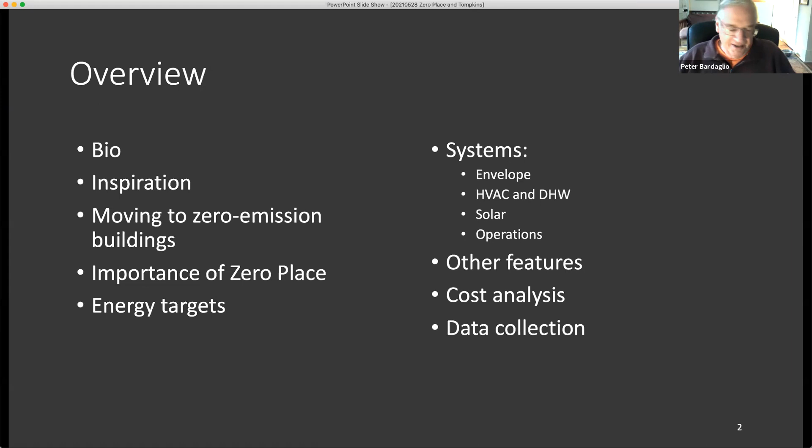Yep. Okay. So let me just tell you a little bit about myself so you understand my perspective. I'm not a developer by trade. I got into this because I have a personal passion towards finding climate solutions. And I think transforming every sector of our economy, every aspect of the way we live, is going to be essential if we have any chance of slowing and ultimately reversing the forces at play across the earth. And so I wanted to make a contribution in at least one of those sectors, and that's the building side.

I began this because I pursued a net zero house back in 2009, and I'm actually talking to you from that home. And I've been net zero now for, gosh, how long is that? 11 years or so, or 12 years. Wow. And it dawned on me a few years into this, wow, this isn't that big of a deal. It was pretty easy to accomplish. And why couldn't we do this at a larger scale?

So I began to work with the guy who built my home and has a similar passion. And we started the initial steps towards seeing if we could do this at a much larger scale with, let's say, a mixed use multifamily residential structure. And so Zero Place was launched. But my day job, I'm the COO for an AI startup based near New York City, and I live up in New Paltz.

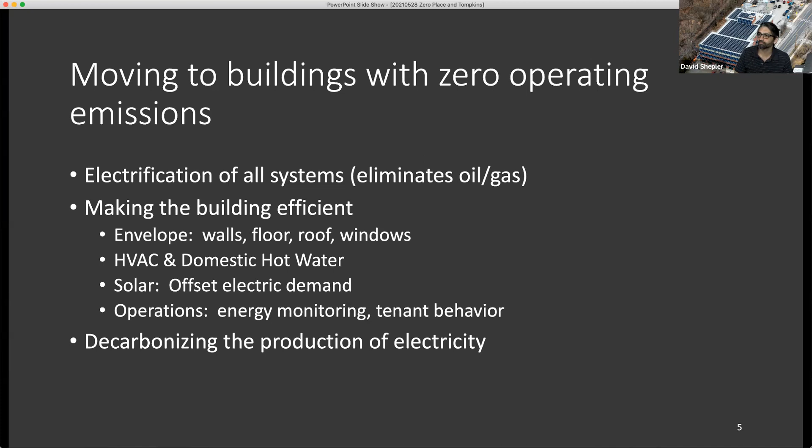Okay, so this is Zero Place. It's a mixed-use net zero energy building, 46 residential units, 25 two-bed and 21 one-bed units. There are 5 affordable housing units in the building. That's required now by New Paltz Village law. There's also 8,400 square feet of retail space. All of that is along the street frontage here.

Can you see my mouse? Do you see a mouse moving on the screen? No? Yes. Yes. Yeah. Okay, great. I just want to be able to point to stuff.

So all of the street frontage here, which is along this side, are all commercial spaces along the ground floor, hence why we call it a mixed-use building, right? All of this is privately financed by myself and my partners. And we are not only going to build it, but also operate the building. We want to see this thing operate for many years and achieve the goals of the building.

We broke ground in December of 2018. Oh, you'll see that this was an old presentation that I've updated the pictures, but I didn't update the text. Originally, we hoped to open as of December 2020, and then a big thing called the pandemic hit, and we're still under construction. So we probably won't open until September.

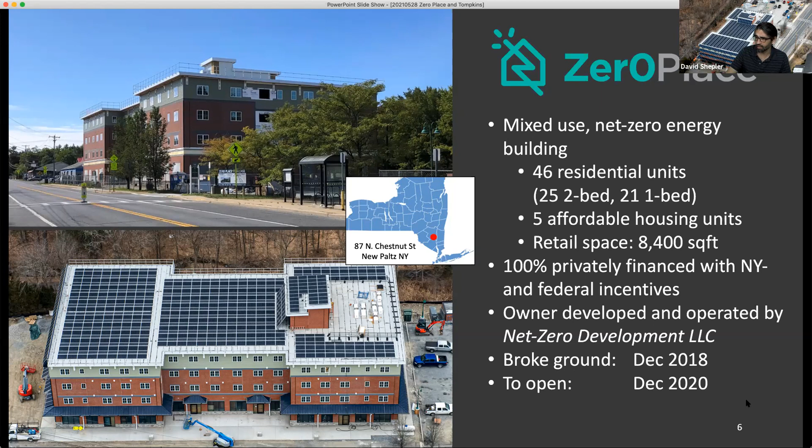Okay. So I'm also proud to say that Zero Place became the first winner of New York State's Buildings of Excellence Award in 2019. There were other awardees as well, and this was presented by the Lieutenant Governor back in 2019, and really reaffirms and validates our belief that our building is fundamentally new and important for the state.

NYSERDA is investing in an independent monitoring system of not only the whole building's performance, but also the geothermal solution, and you'll see why here in a minute. But they're very, very interested in the solutions that we've brought together, and they want to independently monitor so that they can say that, wow, this combination of technologies really achieves what these guys say it can.

Ultimately, with the goal of informing policy for the state moving forward as they try to achieve the most aggressive climate goals now in the country, thanks to the legislation that passed in 2019, with a commitment to achieve carbon neutrality across the state by 2050, which is a tall order.

Just to give you a sense of the goals of our energy targets for the building, you can see in the left column what Energy Star requires today to achieve the Energy Star goals. And you can see that we hope to exceed that quite, more than double the energy performance of the building. You can see how that breaks down across these different dimensions: heating, cooling, water heating, which is a really important one, and lights and appliances, etc.

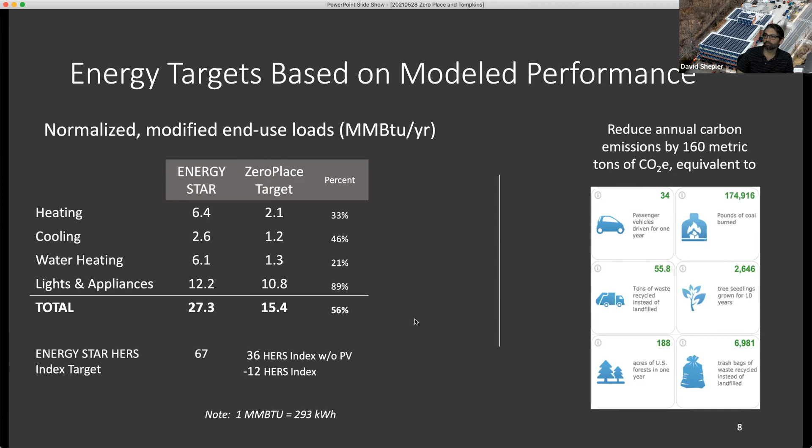Okay, so how do we achieve this? Well, it all starts with the envelope. The sexier parts, things like solar panels and geothermal systems, are important, of course, but nothing is more important than the envelope. You don't want to be throwing away energy by having a poorly constructed envelope using lesser performing windows, etc. So I'll just point out some of the features.

We decided on insulated concrete forms for a couple of reasons. One, we believe in building a building that will last for centuries, not decades. So my partners and I firmly believe that building structures with sticks, like is so common across the country, just makes no sense. It turns into buildings that are going to start having major problems in fairly short time.

I just like to tell this story. My partner is from Switzerland originally, or his family is. And when he took them on a tour once of all the homes that he was constructing about 20 years ago, because they were helping finance some of his efforts, he was doing things the conventional way, and he would show them these McMansions, and they were absolutely shocked to see that these giant, expensive homes were being built with 2x4s. They're used to seeing cinder block construction and a commitment to structures that are going to last a really long time. And so they said, look, we will provide the underwriting for your efforts on one condition: you build buildings that are going to last, no sticks. So that ethic has continued through today.

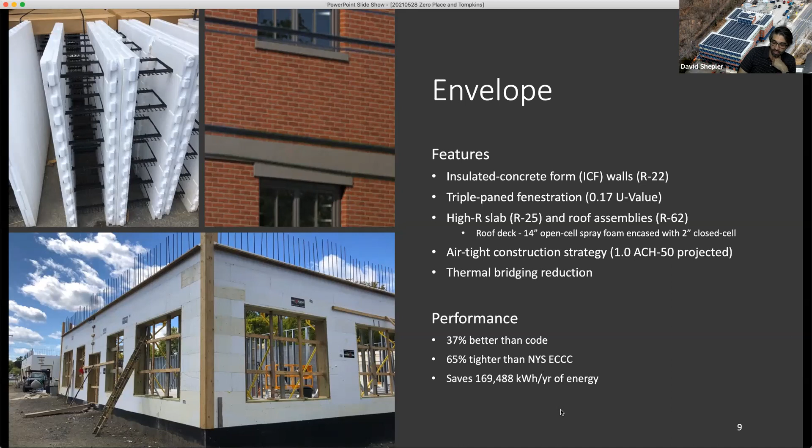Oh shoot, sorry about that. Oops. Hold on one second. Let me fix this. I wanted to update this image to show you the actual geothermal system here, and then I messed up with that picture. Sorry, I will share again.

Okay, are we back? Yeah.

So this is really the heart and soul of the performance of the building, our geothermal solution. This was installed by Buffalo Geothermal, which is an amazing company that's really setting the standard for geothermal performance. Out of Buffalo, the owner of it, Jens Ponikau, is an MD, research MD by day and geothermal designer by night, and is doing amazing work.

And we're going to have the first of a kind system at this scale at Zero Place. And I think Ithaca and the buildings there would benefit tremendously by what he can do. He probably already has a couple of projects in that area, I suspect. But why is this system so unique?

Ultimately, it's a giant ground source heat pump that is drawing from 15 500-foot wells that are drilled below the building. And in this picture, you can see the loop that is drawing from these 15 wells. Each of these black insulated pipes right here are going to those 15 wells.

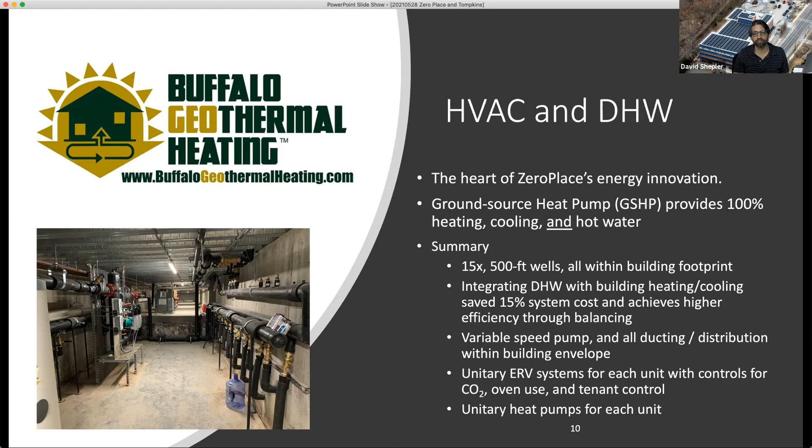And so we have giant tanks in this vault underneath the building that are providing that domestic hot water. There is one other building in the state that has also put its domestic hot water on its geothermal loop. And I believe that one's in Buffalo, and also built by Buffalo Geothermal. But it's a building that's much, much smaller than this one. So there are no systems comparable to this at this scale.

Oh, and just to explain why this is so interesting, we have enough geothermal capacity within the footprint of this building that we could support 28 stories. A building of 28 stories, and provide all the heating, cooling, and hot water needs of it. Of course, the building's only 4 stories, but it shows you the potential of this kind of capability.

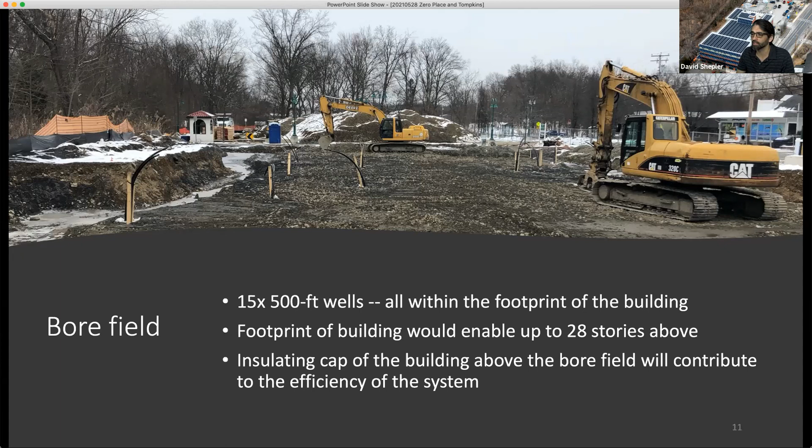Here's some statistics on the WaterFurnace systems. Each unit will have its own heat pump that taps into this large circulating loop. So imagine that you're taking the water from these wells, you're keeping it at a constant temperature, you're circulating that water throughout the building, and each of these heat pumps is tapping into that.

So when it needs heat for the building, it takes heat away out of that circulating loop. When it needs to cool the units, it's taking heat from the units and putting it into the geothermal loop. Interestingly, we believe at some times of the day, take summer, early morning, when one side of the building is being hit by the sun and the other side is in the shade, we actually expect the building to balance

itself. That some of the units on the east side will want to be cooled, while the units on the west side will want to be heated, and they will actually balance this loop during the day, which is a really interesting phenomenon. And that can totally happen when you separate the heat pumps into individual units, as we've done.

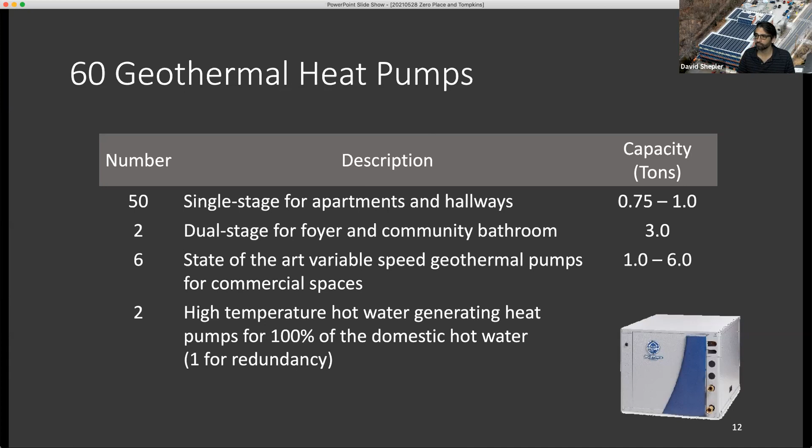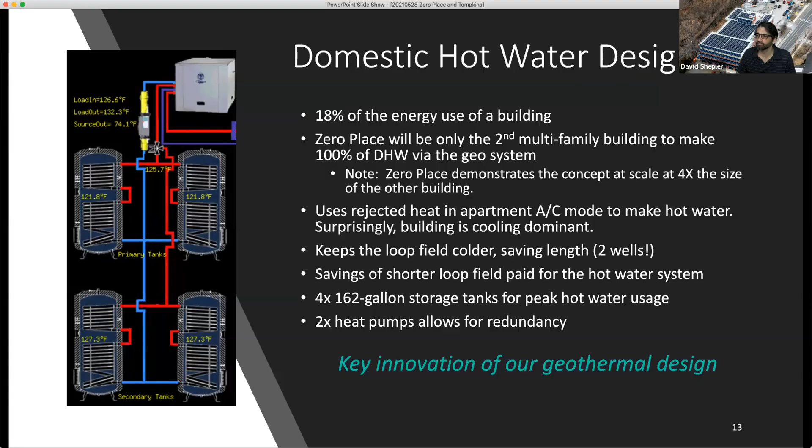I should also point out that NYSERDA has done some really great things here in terms of encouraging explorations like we've taken on here. NYSERDA provided us $109,000 in efficiency rebates for this geothermal system. They've helped with some design reviews. They're going to be doing quality assurance inspections of this. Again, they want to see if this kind of solution is as promising as the modeling suggests. So they're holding our geothermal solution as an absolute reference for the state.

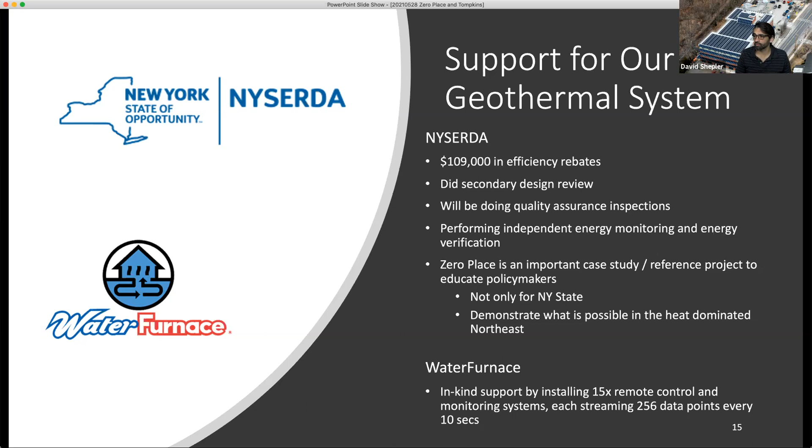Okay, now let's talk about the solar piece of it. So we can't be a net zero energy building if we're not producing energy as well. And just to be clear, geothermal heating and cooling is not producing energy. It's actually using electric powered heat pumps. All that it's doing is creating a large sink through the geothermal wells to allow you to operate very,

very efficiently. So I don't want people to be confused by a geothermal HVAC system versus a geothermal power plant, which is actually using the magma core of the earth and volcanic fissures to tap into actually creating energy, right? You see that in the Pacific Northwest and Iceland and so forth. That's not what this geothermal is.

Our solar system is what's creating the energy and providing all the energy of the building on net terms. And what does that mean? The net piece of it is we're not able to produce energy at night. We're not able to produce a ton of energy in the winter months, right? So what it means is that over the course of the year, we will have produced enough energy to offset all of the demand of the building.

And we're basically using the grid as a giant battery, right? So at night, we're drawing from the grid, and during the day, we're giving back to the grid. And similarly, in the winter months, we're tending to draw more than we're producing. And so we hope that the summer months sort of offset the winter months, and over the course of the year, we prove that we produce more energy than we've consumed.

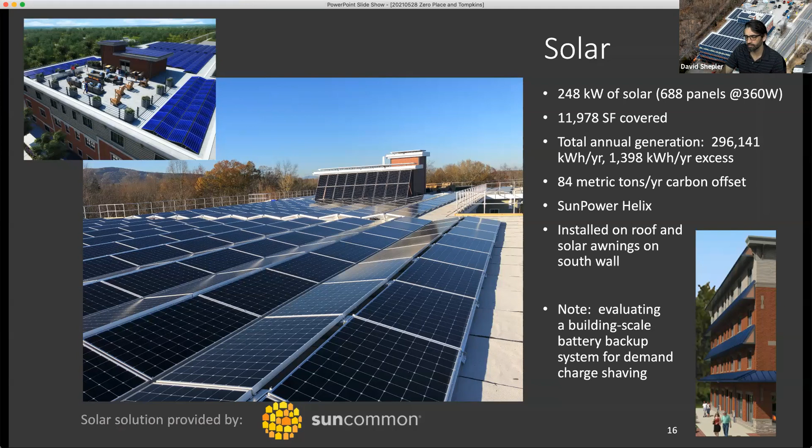So we actually do have a natural gas fired generator on premise, but we're hoping to have a battery solution too that could at least provide enough to get us through probably half of a day. So we're playing with that, and we're going to see if we can in fact install that.

Okay, the last piece, but a really important one, is the operations of the building.

There's actually a constant debate among us. There's our energy rater, who's a really impressive guy who does all the energy consulting in this area. He believes that in this building, we're not going to really need to incentivize our tenants much. You just let the systems run; they take care of themselves. People are comfortable; they're not going to be tinkering too much with the heating and cooling. In fact, they're encouraged not to do that. Just to leave them set at whatever temperature they want and are comfortable throughout the year.

But I want to be prepared to encourage my tenants to be as responsible as possible. So I've actually commissioned some of my ex-employees who are software developers to build an app for our building. Surprisingly, there are not good apps like this in existence today, so I had to do some custom software development. But basically, each tenant is going to have an app that tells them their instantaneous consumption of their heating, their HVAC system, as well as their plug load, their washers and dryers, everything.

It'll tell them what they're consuming: their instantaneous, their previous day, their previous week, the previous month, and it will also compare them to the average of a comparable unit. So the 2-bedroom units will compare their consumption with one another, and 1-bedroom units as well. So they will have full transparency into what they're doing and how they compare to their neighbors, obviously in an anonymous way. They're not going to know who's doing what. No one will know what Bob and Jim and Sally are consuming, but they'll know how they compare to the average.

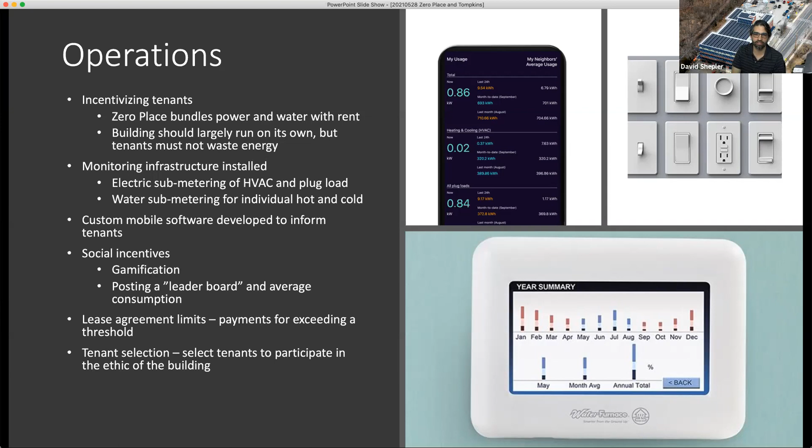We've thought about gamifying this, in fact, anonymously letting people compete and putting this on a big board in the lobby, and maybe creating some incentives, like you get a gift certificate to the restaurant downstairs or whatever. So we're looking at things like this to encourage people. But I think the main thing is just making your consumption transparent so that you know what you're doing. And so we'll see how that plays out.

Some other features on the site: we're installing 20 EV charging stations. That'll be way more than we're going to use today, of course. We want to be ready for, hopefully, the fast growth in EVs, in electric vehicles, over coming years. We also sit adjacent to the Empire State Trail, which is a great feature of this building. So we're installing 50 bicycle racks on the property.

We also have a bus stop on our property, and I'm hoping that some of these tenants will not even have personal vehicles. We'll see if that turns out, but you could function in our building without a private automobile. It's not super easy, admittedly, in smaller towns like New Paltz, but we have the infrastructure to perhaps support that. And the other cool thing about these charging stations is each of them is equipped to charge an electric bicycle as well. So maybe if people want, they can get an electric bike, and they have all the infrastructure here to take care of that.

We also have bike lanes along all the street frontage. And basically, we support the whole concept of complete streets, and we think our project really has the assets that are consistent with that concept. We're seeking LEED Platinum and the LEED Pilot credit for passive survivability, which means that the building, if it loses all power, still maintains at least 50 degrees in an ambient state, meaning that if there's a crisis in the area, we can bring people into the commercial spaces, for example, to support them through emergencies.

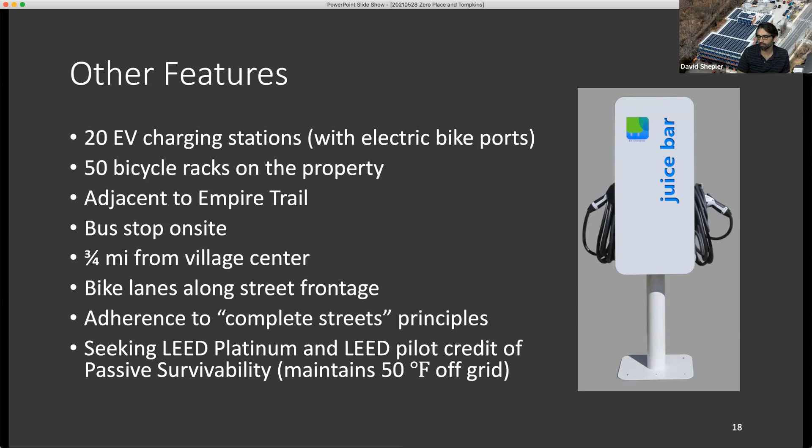So cost is a really important piece of this, right? And I'm sure it's something that you're interested in. What would it cost for developers if you mandated these kinds of standards? Well, admittedly, there is an investment here, right? Solar isn't free. These geothermal solutions aren't free. A superior envelope is not free. We estimate that it's costing us somewhere on the order of a 20% to 25% premium over standard code.

But we estimate that payback will come to us in 8 to 10 years. In other words, an upfront investment will actually continue to pay forever while the building functions. And anyway, we broke down some of those costs across these different elements just as an initial stab.

Oh, I forgot to mention one thing when I talked in the additional features section, and that is we have a really cool elevator solution. When the elevator is coming down, it's actually driving its electric motor in reverse and is generating electricity.

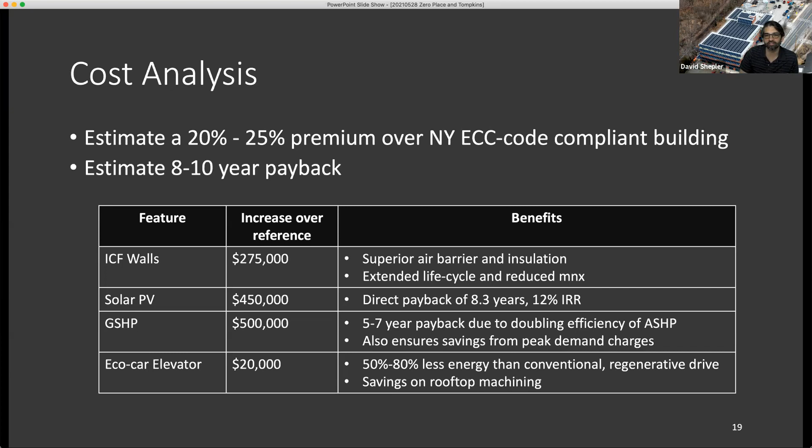So even the elevator is part of our overall concept. And we are also looking at creating a small gym for tenants, and we're thinking of purchasing these treadmills and bicycles that also generate electricity for the building when you're running on them or riding the bikes. And the thing even shows you how much you've produced for the building after you've finished your workout. That's a kind of cool system.

Another piece is we're collecting data up and down this building to understand how it's performing across all of these dimensions. That'll be very interesting for NYSERDA in the state. It will also allow us to tweak our solution over time. But we really, really want to understand how the building is performing and what makes sense to do for other buildings in the future, what works, what doesn't, et cetera. And you've got to have the data to really look at that. I'm kind of a data nerd due to my day job, so I'm excited about diving into this aspect of the building as that data materializes.

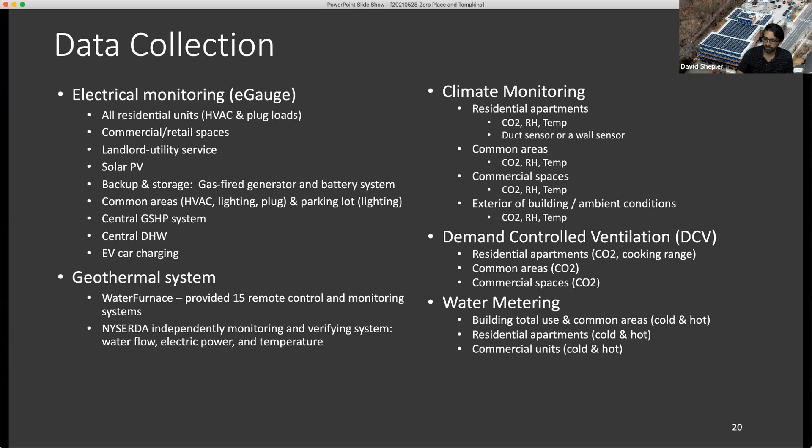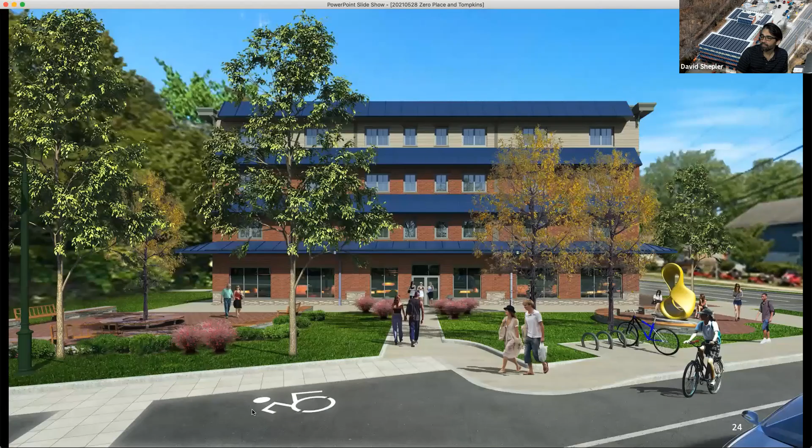Hey, David, how large is this building? I'm getting questions in chat about that. Sure, it's a 4-story building with 46 apartment units, and about 8,500 square feet of retail space on the first floor. So overall square footage? It's 16,000 square feet per floor, roughly. So multiply that by 4. What is that? 64,000 square feet, roughly. That's great.